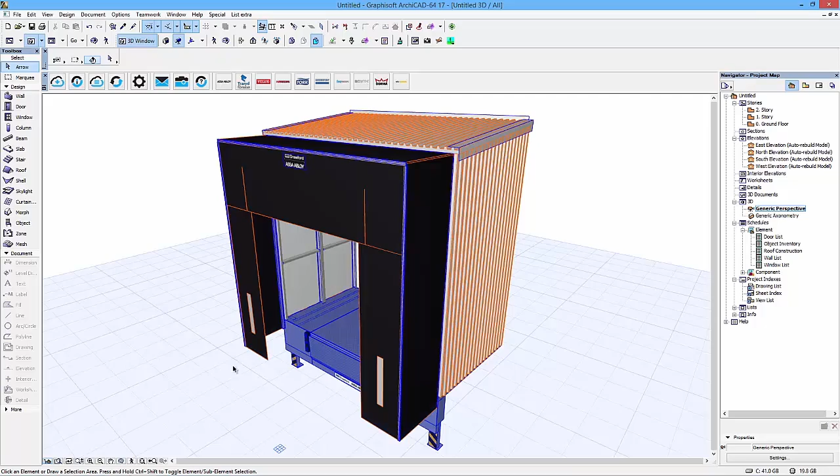The loadhouse here is a combination of an actual loadhouse, dock shelters, and also the available dock levelers, put together in different combinations. We'll have a deeper look at this LH6080L. The LH6010L is also available for you.

In the UI interface, you can see to the right here, you have loads of options where you can actually configure and define your loadhouse. Depending on which options you choose here, you get a different outcome of the other parameters and alternatives. So we have different kinds of housings, curtain shelters, and also swing docks here. You can also change the different dimensions here, and depending on what dimensions and which product you choose to put together, you get different options here. Everything helps you configure the correct kind of loadhouse.

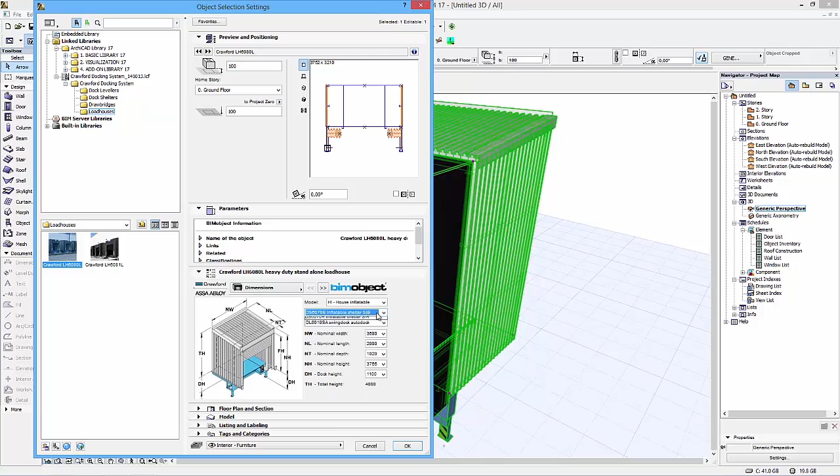When you're satisfied with your first configuration here, and you have chosen your shelter and leveler options as well as the housing, you can continue to the next page and choose how you want your loadhouse configured. We have three options here: the insulated, uninsulated housing, and also the steel frame. This is of course represented for you in 3D as well.

You also get a small description of what you're actually choosing here and what kind of fixing details you need. There are three different kinds of fixing for the loadhouse itself: insulated wall, concrete wall, and light concrete wall. This comes with a small illustration and some instructions as well.

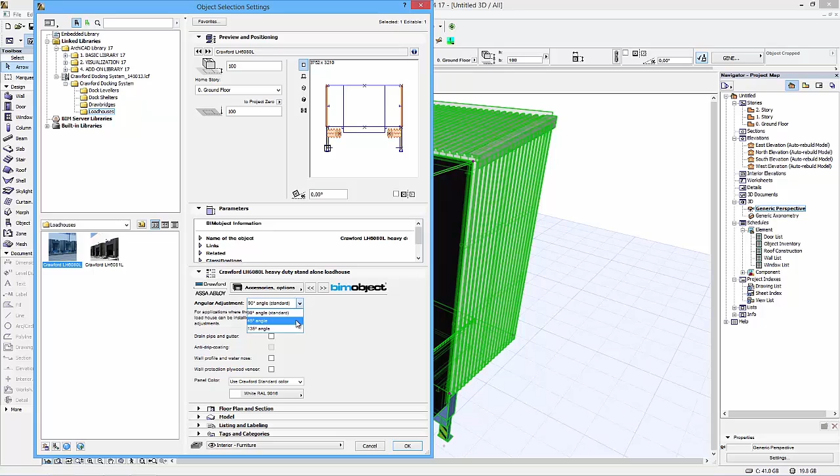In the accessories and options page here, you can choose the angular adjustment of the loadhouse as well. If you want an angled installation, you can choose between 45 degrees and 135 degrees. As you can see here, the model changes accordingly to your choice, so you can fix it diagonally onto a wall if needed.

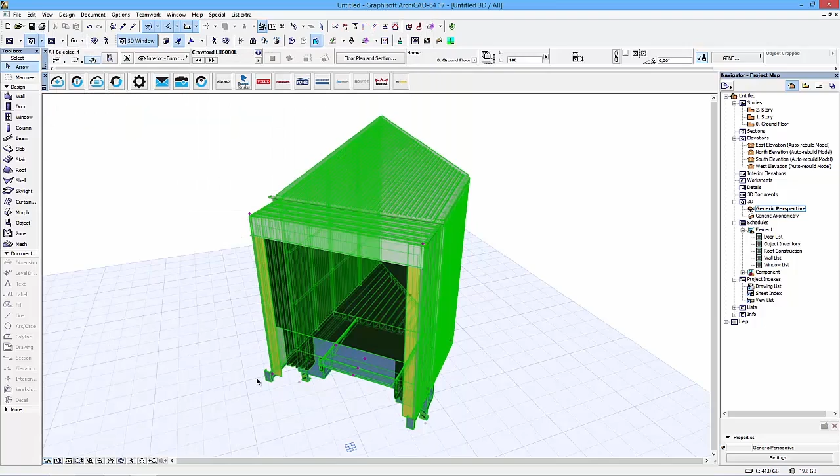There are also other accessories and options here available for you, which will be represented in 3D view - drain piping and gutters, for example. As you can see here, when I activate these, they also get activated in the 3D view. This helps you with the looks and the function of the actual options.

If we continue here to the next page, we have a description of the actual loadhouse product. We also have shelter options, so some different options for the docking shelters, such as colors, for example. The front color here is always Crawford standard white, but you can choose different RAL colors as well - there's a full RAL color library included in this object.

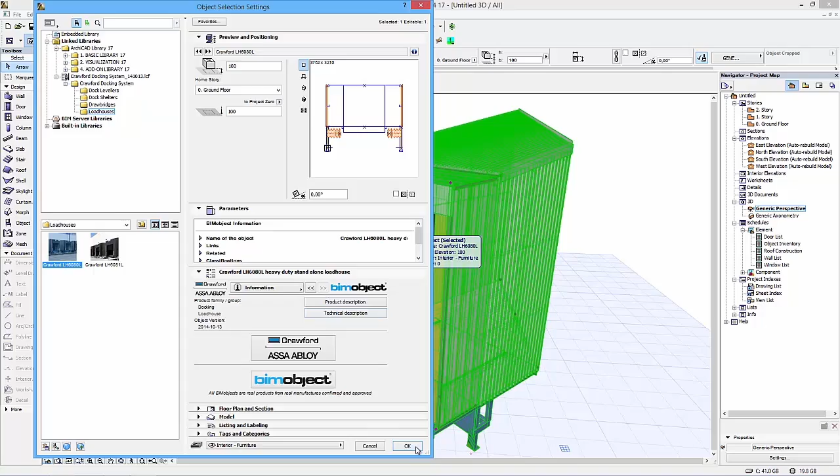There are leveler options as well, as there is in the standalone levelers. You have the different lip types, lip shapes, and lip profiles - aluminium in this case - some oil settings as well, the standard ArchiCAD 2D and 3D drawings, and also links back to proper documentation and more information if needed. As you can see, every option and every change I make actually reflects in the 3D view as well.

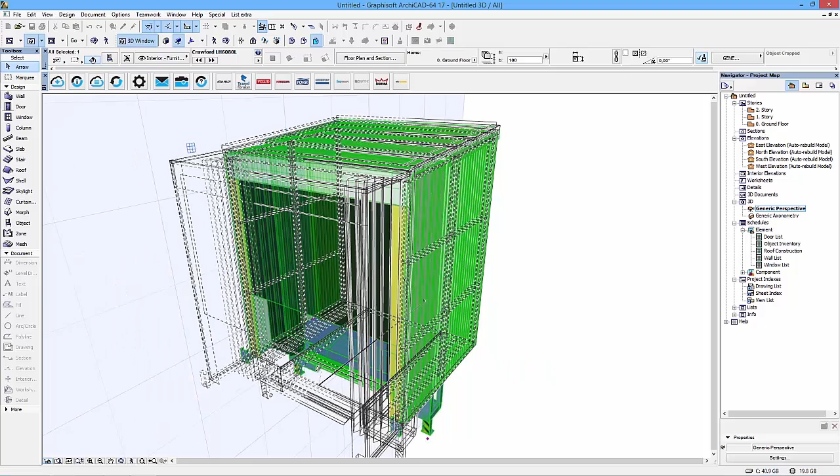And you're not constrained to use the user interface for changing things. You can also go in here and use the purple hotspots to dynamically change dimensions and other functions in the 3D view as well.